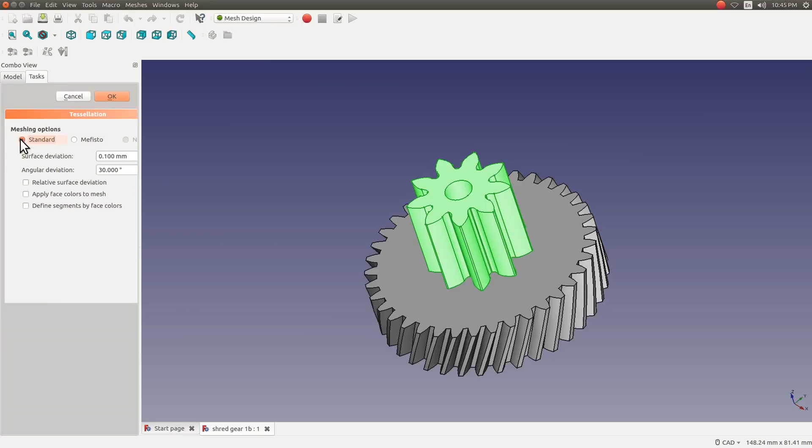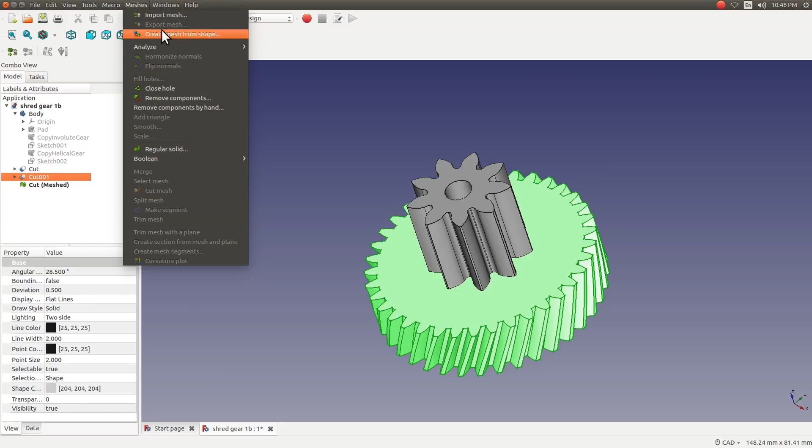You'll now notice that the outer appearance of the pinion gear has changed. This gear has now been enveloped in a mesh envelope. Next, we'll select Cut 001. Again, we'll select Meshes from the top window bar and click Create Mesh from Shape, select Standard, and click the OK button.

Notice now that we have two new elements in our tree: Cut Meshed and Cut 001 Meshed. Before we're finished, though, we need to unify both meshes into a single unified mesh. This is done by selecting Cut 001 Meshed, then while holding down the Shift key, press the up arrow. This causes both Cut 001 Meshed and Cut Meshed to be selected. Going back to the top window toolbar, again select Meshes and then select Merge.

You'll now notice another entry in our drawing tree. This entry is labeled Mesh 002. This is our final unified mesh. All we need to do now is export this mesh to a stereolithography file, better known as an STL file.

While we could go to the top window menu and select File, then from the drop-down menu select Export, I've had better luck just by clicking the Export Mesh to File icon. Again, follow my cursor. You'll now be presented with a dialog box, and at the bottom you'll be asked to give a file name. Here we'll enter Shred Gear. Then press Save.

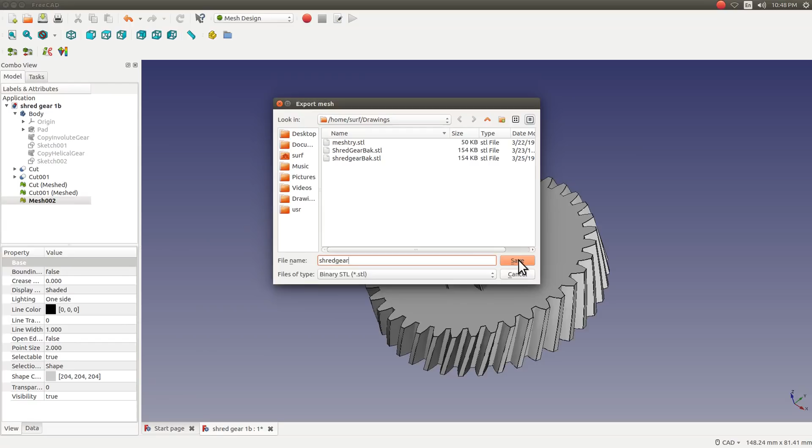We have now exported our mesh to an STL file ready for our printer. For those of you who don't own a printer but want to see this gear printed, we'll do just that. What you're looking at now is the screen of the software which controls my printer. The gear we designed is already placed on our virtual plate ready to print.

One thing to understand about any mesh file is the surface you're looking at is made up of thousands of small triangles. The more detailed the surface is of a particular region, the more triangles will be needed to represent that region. To give you an idea of the triangles involved, I'm going to highlight the triangle edges to give you a better idea of what I'm talking about.

As you can see, this gear is quite complex. Before this program can print the gear, our file needs to be passed to the slicer, where our STL file will be converted to a G-code file that the printer understands.

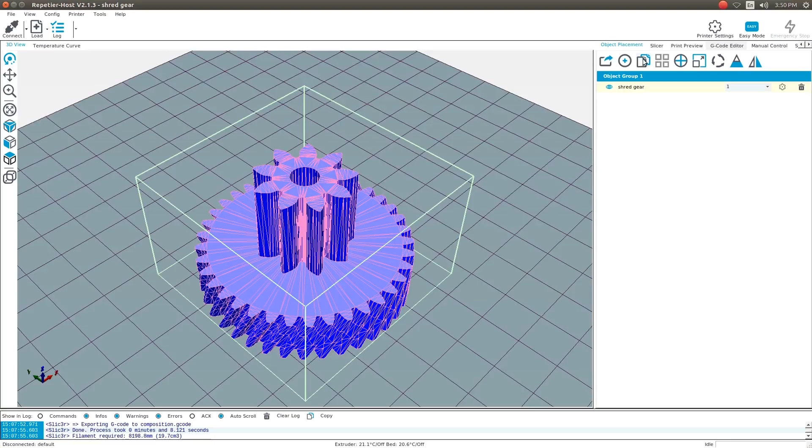Now we're going to press the slice bar to generate the G-code. When we're done, a virtual mock-up of our finished part will be shown. It's also possible to view different layers of our print, and it's also possible to check the G-code the slicer has generated.

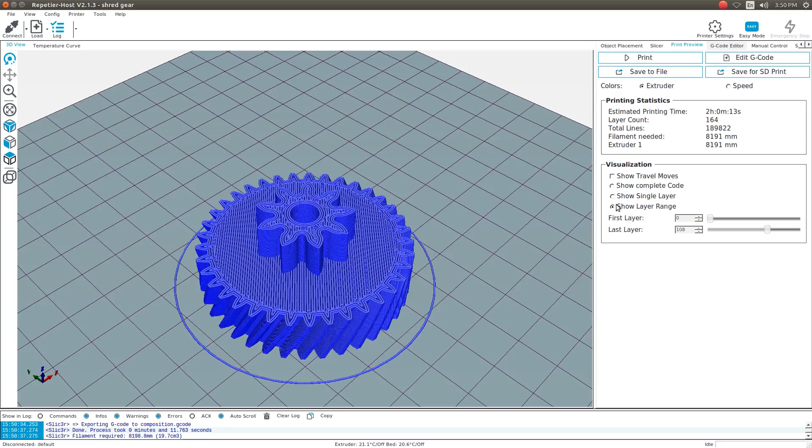For this one print, the slicer has generated over 189,000 lines of code. We're not going to check this code, just take my word for it. So as not to bore you with any more details, I'll just save this G-code to a micro SD card and plug it into my printer.

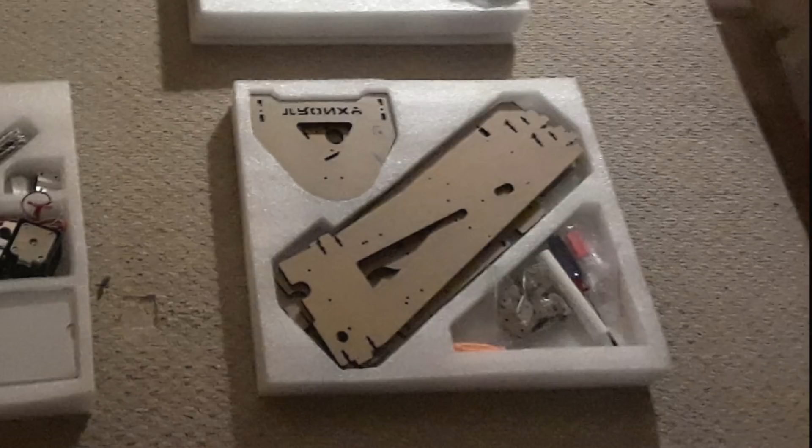To the dismay of my friend who paid over $1,000 for his printer, the quality of my prints were actually better than his for the same STL file. In case you were wondering what I did, I plan to do a video explaining the tune-up process which I created for my printer.

As promised, I'll now show you how to get the software you need. To my complete surprise, getting the files you need is now really easy.

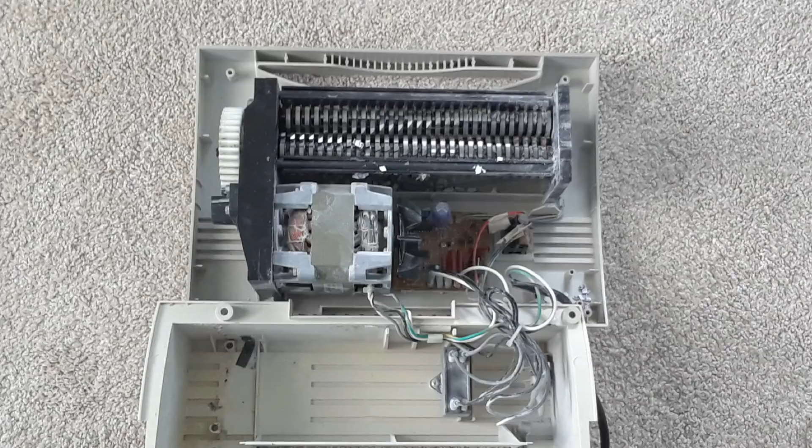Noting that nothing consumes precious time like watching someone slowly remove hardware, I'll spare you this. To begin, there are 5 1/4 inch screws that need to be removed. Next, you'll need to remove the bottom cover. We now see the internals of our shredder.

Of particular note is the wire routing. You'll want to pay special attention to the motor fan and the wires running next to it. I'll cover that in detail during reassembly.

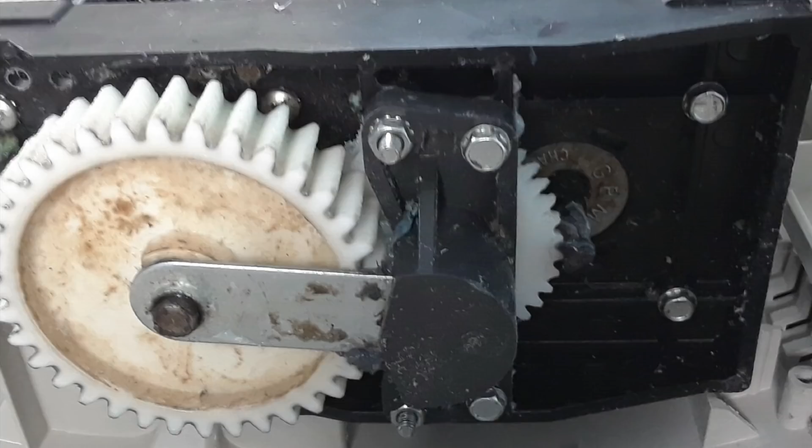Here we have a view of the gear compartment. As seems to be true for most Fellowes shredders, the first thing to do is remove the motor. This is accomplished by removing the 4 7mm screws highlighted in the view.

The next step is to remove the black plastic support covering the defective gear. This is done by removing 2 7mm nuts and then carefully removing the support. As you loosen the nuts, you'll want to reach behind the unit and put your finger on the head of the screws to keep them from backing out of their recesses.

Here we see the steel support arm stabilizing the shaft of the large and defective gears. From this point on, you'll want to pay careful attention to any washers and spacers you may find. Take note of how they came off and reverse that procedure upon reassembly. It's now time to remove the steel support.

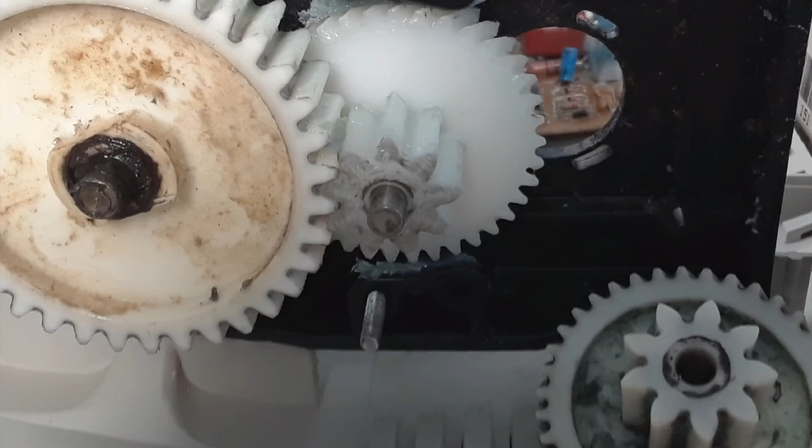Here we see 2 gears exposed along with the old defective gear. You'll next want to remove the large gear pointed to by the arrow. For those of you who wish to see a view with the large gear removed, I refer you to a photo contained in part 1 of this series. At this point, the large gear simply pulls off of its shaft.

Next, you'll simply pull the defective gear off and swap it with the new printed gear, which in this view has already been done.

One point I want to make before we start reassembly is the matter of lubrication. As you can see, relative to part 1 of the series, I thoroughly cleaned the interior of the gear compartment and lubricated all gears with a good quality silicone grease. With plastic gears, this will go a long way toward extending the life of your shredder.

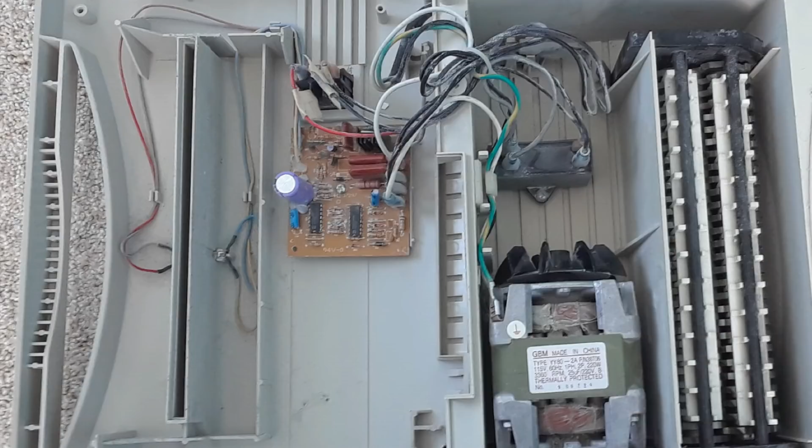Up to this point, reassembly is simply the reverse of the disassembly procedure. For the first time in this view, you no longer see the shredder mechanism lying atop the top cover, but rather sitting inside the bottom enclosure. This is necessary for proper wire routing.

Before flipping the top cover over the shredder, make sure the highlighted wires are routed through the indicated clips to keep them from colliding with the motor fan. As the last step, flip the assembly upside down and replace the 1/4 inch hex screws.

Your shredder is now powered up and ready for many years of additional service. This ends the final part of this series, but as I've said before, with FreeCAD and this channel, this is only the beginning.